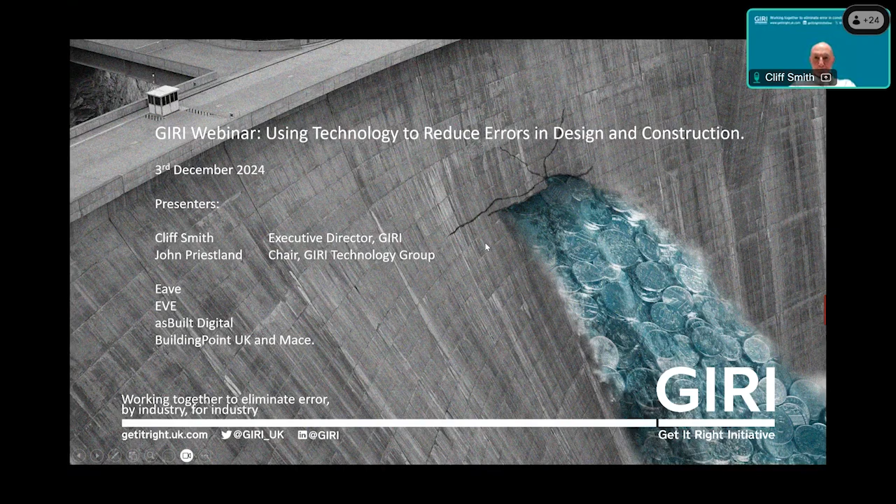GIRI was founded back in 2015 following a meeting at the ICE best practice group, and we obtained funding to do some research into the cost of error, because at the time it was unknown what the cost of waste and error was to the industry.

The result of that research was our strategy for change, and this is a resume of some of the cost reporting that we found. We used various methods to get these figures.

The direct cost of error is 5%. This is the error that one might come across with NCRs and tablet records and things of that nature. Then we have the indirect cost of error, which is the impact on other third parties, normally in the form of loss and expense claims or the like, but that came up at 7%.

And then we have unrecorded process waste, which is at 6%, and this is errors which remain unrecorded. Latent defects come after the building or infrastructure has been handed over, and the total is 21%.

Now, this depends on the complexity and size of the project. It may vary, but it's still an order of magnitude greater than the average return on turnover in terms of profitability. So the root causes of error we found, these were the top 10.

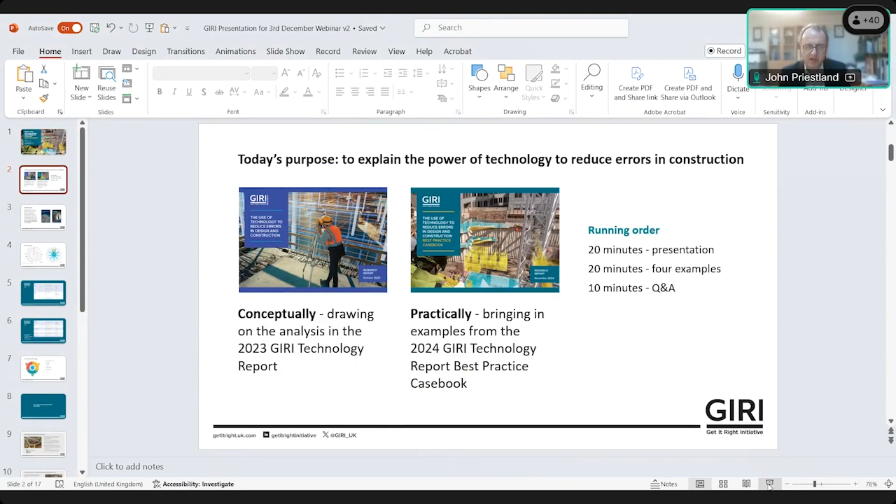Last year we produced a report that considered the types of technology that can help reduce error. This year we've come up with a much more practical report which goes through some of the best practice examples of where technology is really being used to reduce error.

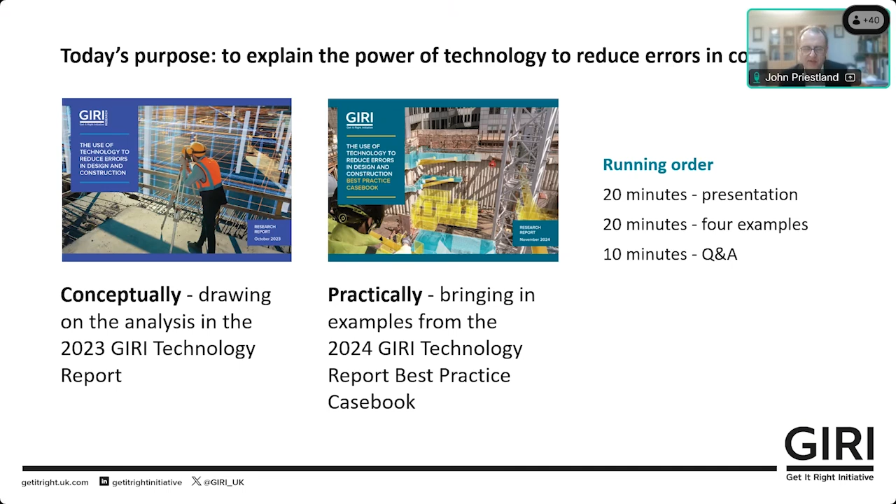So I'm going to talk for a few minutes, but with this being a best practice casebook, we thought we should have some of the people who are doing the best practice. So we have four speakers who are going to talk for five minutes a pop, and they will hold to their time absolutely perfectly. And then, after a little bit further wrap up from me, that should allow us to do a little bit of Q&A.

So our starting point goes back to some of the early days of GIRI and their iconic research report from April 2016, where they came up with 17 most prominent causes of error. And we linked that with work that we've done within the C-Tech Club. The C-Tech Club is a group of more than 400 founders and CEOs of construction tech startups who come together to collaborate and share the celebrations and the commiserations of being a founder in construction.

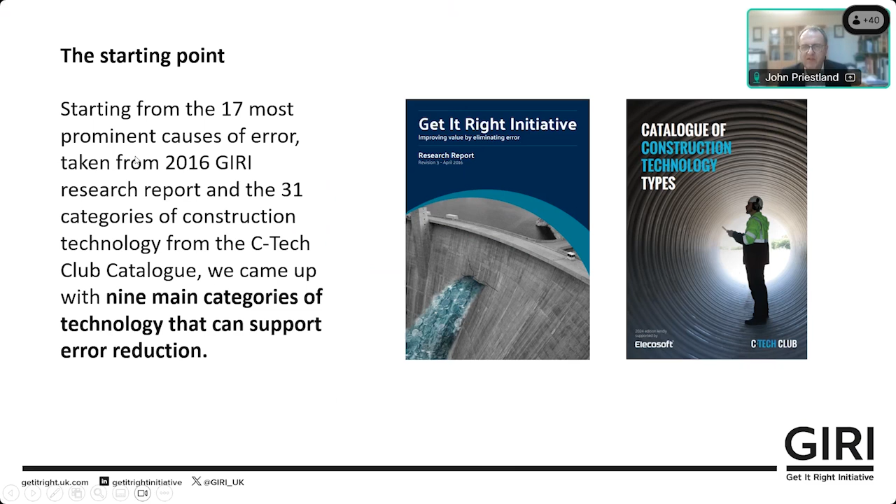And we came up with nine main categories of technology that linked to those 17 most prominent causes of error. So two diagrams to hit you with on the screen. The left one is from the GIRI 2016 report - these are the 17 most prominent causes of error, from inadequate planning, going anti-clockwise, late design changes, poor communication of design information, etc., through to poor site conditions and access. And then the wheel on the right is our C-Tech Club 31 categories of technology, starting from number 1, top right, geotech scans, number 2, 3D visualization environments, all the way through to digital handover software, and the importance of this golden thread of how all the information comes together.

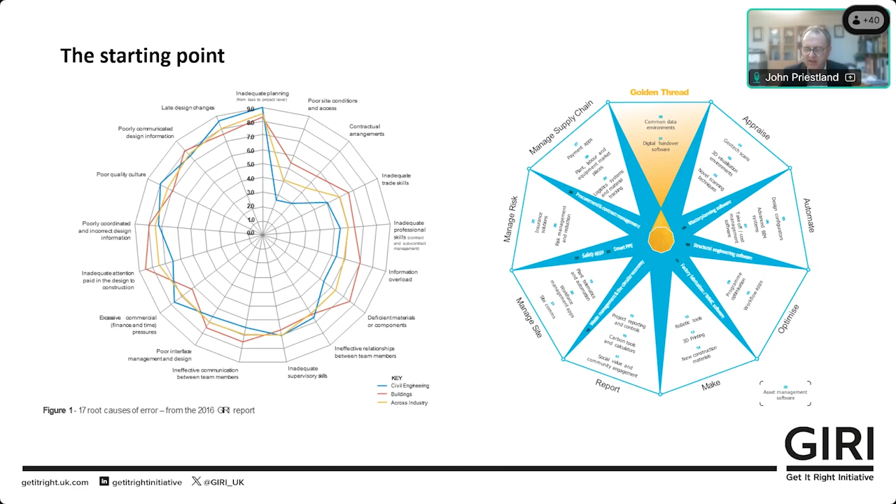So effectively, last year's report was a fusion of the 17 points on the left and 31 points on the right to come up with 9 categories of technology that make the greatest difference.

So we can use technology to check - checking technology around BIM checkers, schedule checkers, data checkers, and checklist technology for our groups and teams on site.

We can use technology to automate the generation of designs or scheduling. So a rules-based system that's going to get it right every time because it's applying the rules in the way the design is laid out or the schedule is laid out. Design configurators and automated scheduling systems being the two subcategories there.

And then seven more categories: workflow engines that are going to ensure that the steps between different stages in the process are managed well, and that there's no error in terms of who's coordinating and who's responsible for each step in that process journey. Visualization systems that with digital rehearsals help people practice before they go and do tasks on site to make them safer, more likely to get right first time, and the ability to visualize and see the tasks and the design environments in a virtual or augmented way before the task is undertaken, in terms of virtual reality, VR, and augmented reality, AR.

Then there's communication and collaboration tools, one of which you're going to see in a few minutes, that help people communicate better, have better structured conversations, so that the error doesn't come from the poor communication or the misunderstanding.

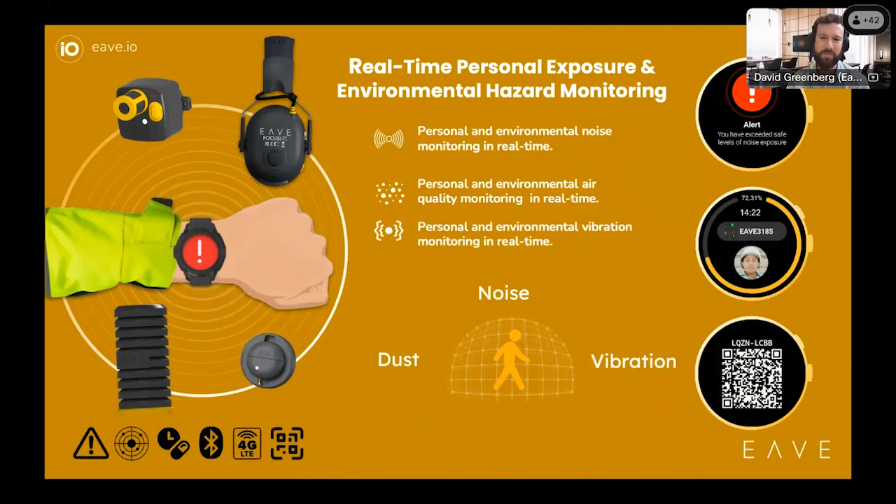So you've got the health watch, which is assigned to an individual. You've got a tool warden, which is doing things like trigger time for power tool usage. You've got noise warden, which doubles as both a personal exposure monitor for noise as well as an environmental noise monitor. And you've got air warden, which does things like particulate matter monitoring, so dust. Obviously, people are worried about silicosis and silica exposure as well as asbestos, but it also does VOC, so volatile organic compounds, so gas exposure when you're doing excavation or demolition work.

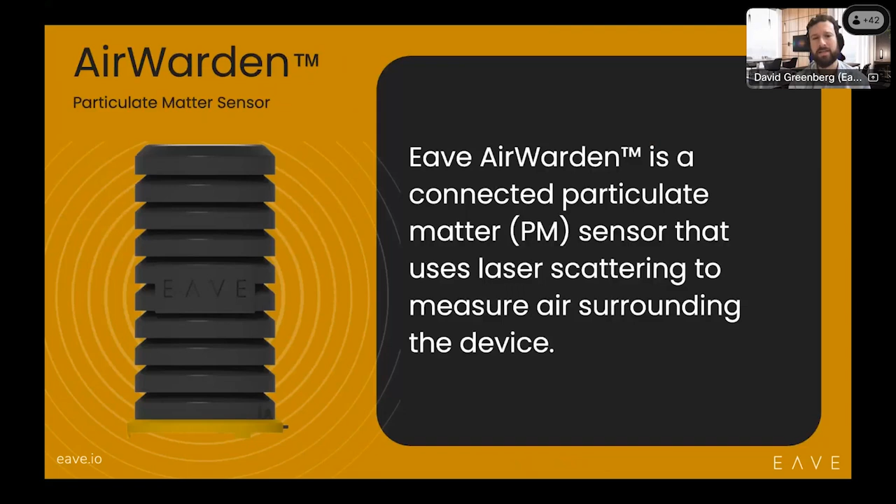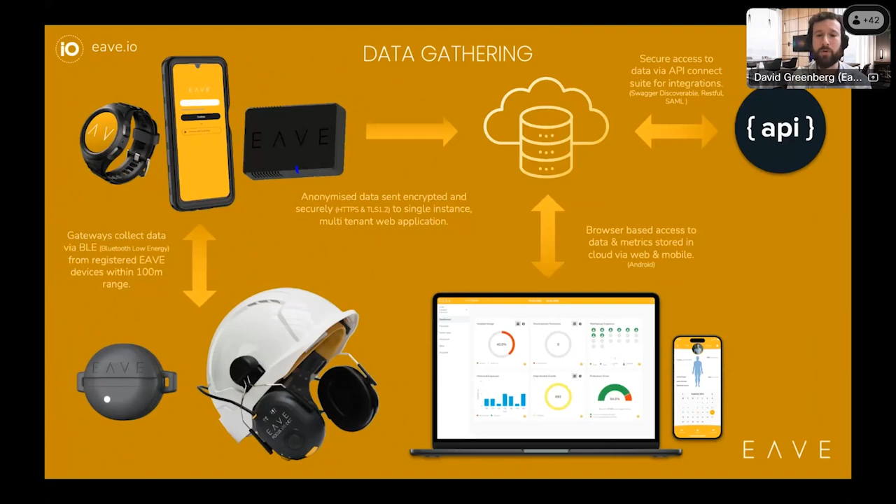It's a total end-to-end ecosystem, so you've got devices in the field, the data goes from the edge to the cloud via those gateway devices, so the watch, the phone, and the smart hub. It connects into whatever platform the construction managers might be using. For example, Power BI is a very common one, but equally they have access to their own proprietary dashboard of information for their company. And that is it. Thank you so much.

It's been a pleasure, obviously, working with the team at GIRI and also with Galliford Try over the years. We often try out some of our new things first with Galliford Try because they've got that sort of forward-thinking mentality, which is fantastic. But if anyone here would like to find out more, then feel free to make contact. Thank you so much.

I love what David's doing because he's moving on from the ear protectors into a whole range of other safety-related and environmental systems, and we are pleased to see that that's what successful startups are doing. It also shows that a safe project is one that's likely to be environmentally well managed, and one where the error reduction, the quality is going to be high as well. I think it's the ability for workers to communicate in the normal way that we saw as particularly linked to error reduction. But thank you very much, David, for all of that, and well done.

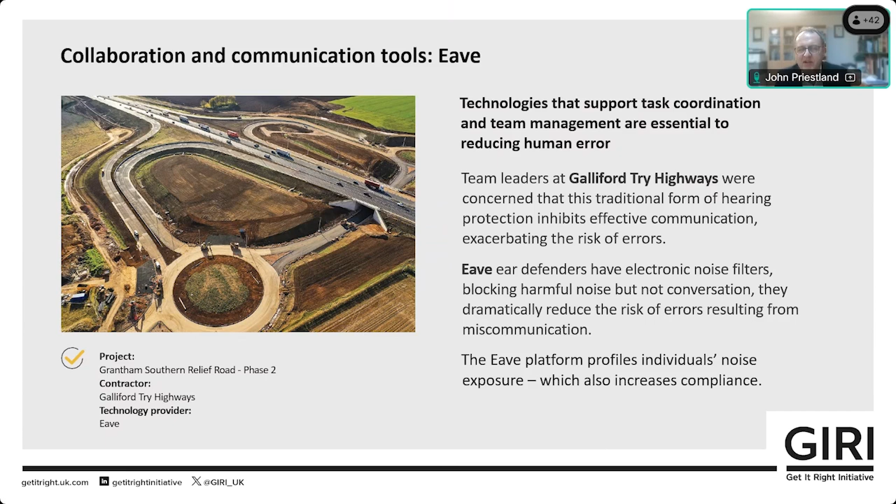Slightly bizarrely, our next technology product that we're going to share with you is also called Eve, spelled slightly differently. Who would have thought? So our next project is EVE, Engineer, Visualize, Explore, a tech system developed by Mabey Hire. The example that John Wrigley is going to talk about is for the contractor George Leslie Limited for the Scottish Water Renewal Project at Happendon.

I'll just emphasise, as I hand over to John, what I think is very pleasing is to see technology and error reduction and quality really being used in the field. This is not abstract, this is for real, and the people here today are able to share what it's actually like on the ground. So John, over to you. Share your screen and take EVE away.

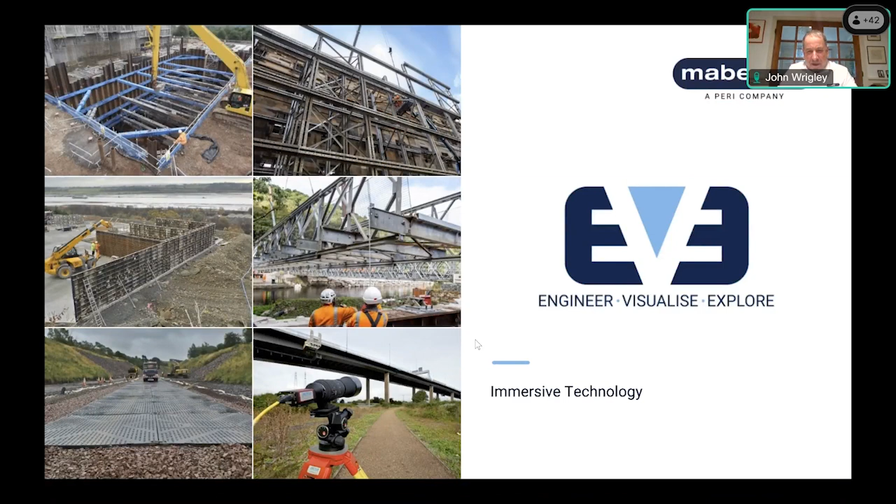Thank you very much. EVE stands for Engineer, Visualize and Explore. I'm John Wrigley from Mabey Hire. We're delighted to be part of the technology report this year. We've used this innovation to essentially cut out mistakes from the planning stage through to delivery on site. We can use it not just to make sure there are no clashes and nothing can go wrong through the planning, but also right through to literally giving an instruction manual on how it needs to fit together on site. It's important to consider that temporary works are one of the nine high-risk areas of the construction process, so it's critical that temporary works are got right first time.

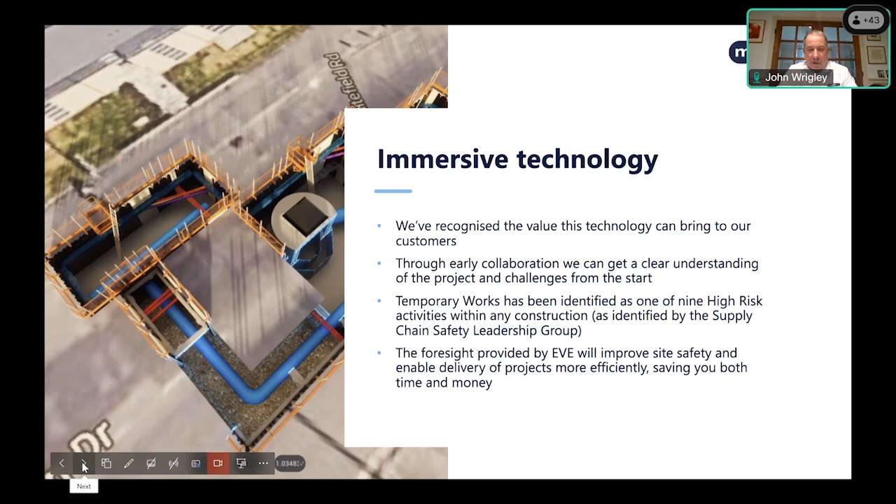So I'm going to show a short video in a minute. Susan, if we could move on to that, which should demonstrate it better than I can describe it.

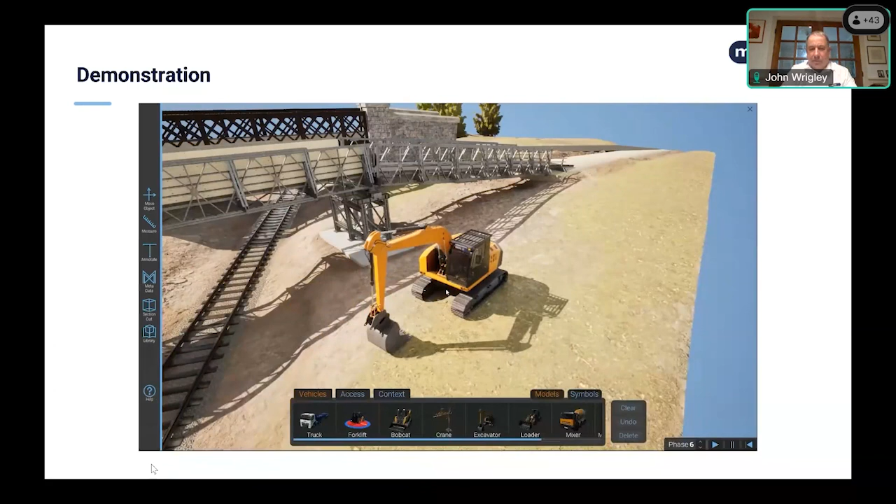I apologise for the music on that one. I had nothing to do with the choice of that.

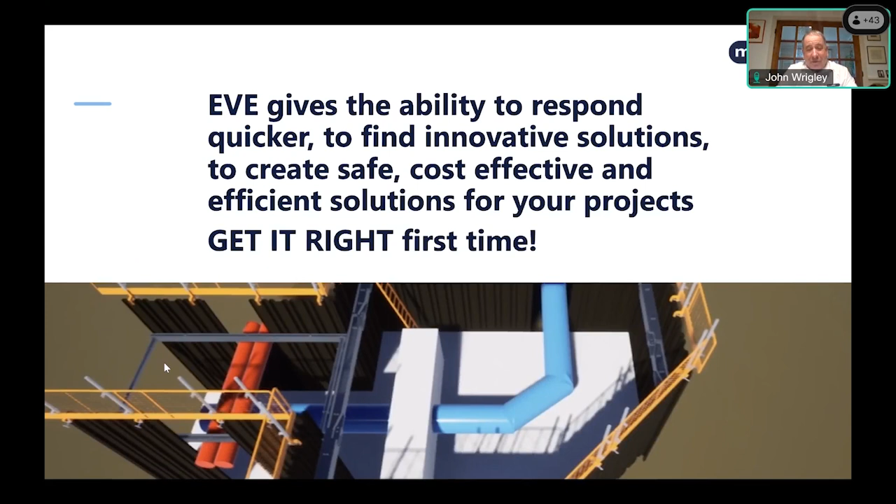So if we go on to the final slide, it's important to point out that we as a temporary works company, despite having hire in our name, we also install, and we use this innovation ourselves. It helps us, and it should help anybody using temporary works. It gives the ability to get it right from the start, right through to the final delivery of the project, which we all know is critical. There's so many things that can go wrong throughout the construction process, and it really does get it right, so I think it fits the bill of GIRI perfectly.

Thank you, John. So it's all about enabling the engineering design team to visualize the site context and provide that visual brief on what was to be excavated. A little bit like a digital twin, being able to see what you need to do beforehand, and then it's easier when you go and get it right first time.

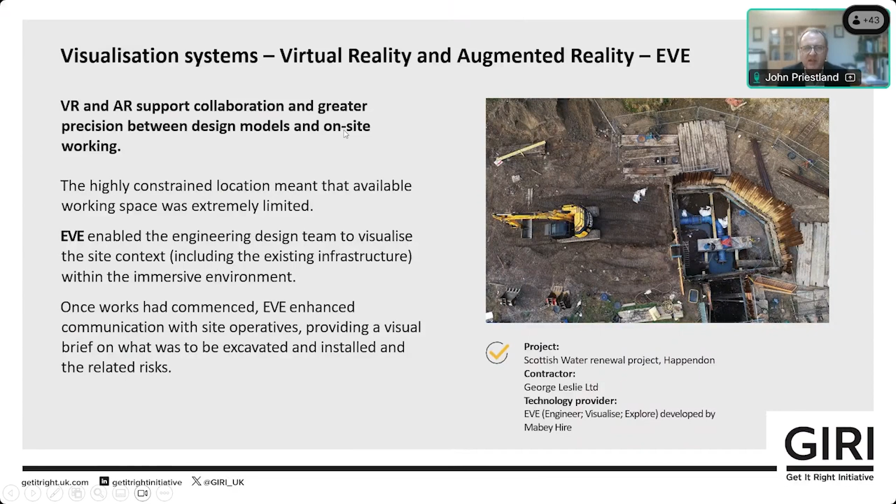So our next presenter, as David Burton knows, one of my favorite projects. This is a project that Asbuilt Digital put together in Adelaide. Imagine the challenges of refurbishing the cladding of a building, which panel goes where, what do you need to do, what sort of database would you need to maintain an accurate record of who's doing what. So David, over to you to tell the audience here about your project with Hindmarsh Construction, and take it away.

Okay, so digital twins. I think John likes the practicality of what we've done here. Digitization in construction, for us, a lot of the focus traditionally has been on converting real bits of paper to digital bits of paper. For us, it offers a whole lot more. This use case here, we use the term digital twin, and I guess that gets banded around so much in our industry. But what does it mean, especially during construction? For us, it's really replicating what's happening on site, the milestone achievement and the workflow, back into this digital environment.

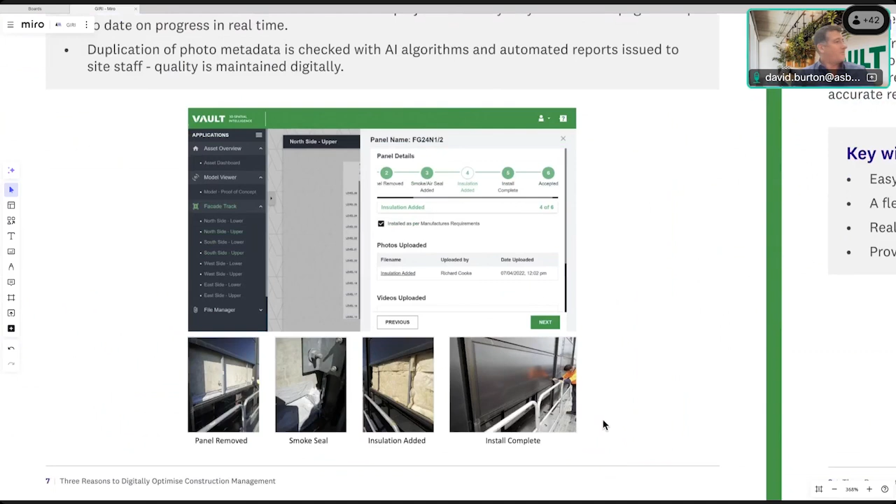Rather unfortunate name, this project. It was on Grenfell Street in Adelaide, Australia, and it was a replacement of the at-risk fire facades.

What we were doing with the contractor and the supply chain on site is each time they did a task, they removed a panel, installed the smoke seal, installed the insulation, completed it. All of that record keeping was done on the device. So really, at the heart of what we were doing, we were speeding up their workflow, removing the paper piece, and recording that almost as it was happening on site.

Now, bless our lovely subcontractors, they don't always do what you want them to. The first month they tried to cheat the system by uploading many of the same photographs. The system checks the metadata and says, hang on guys, that's not quite right.

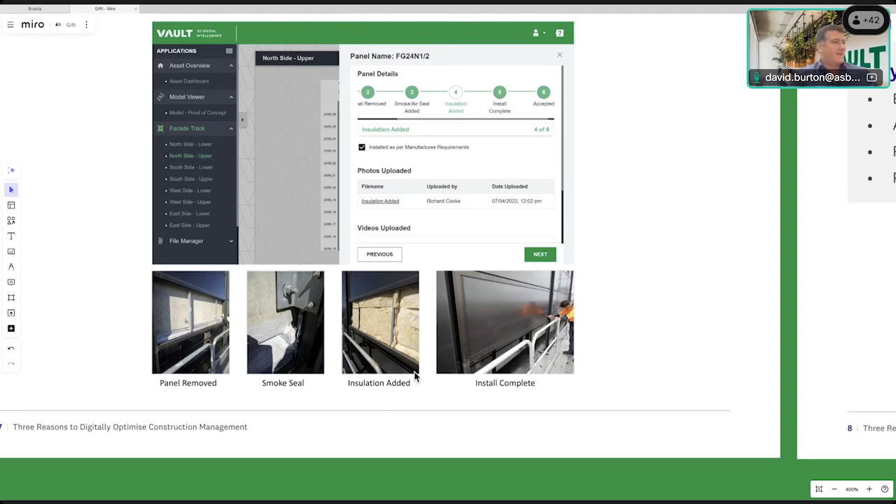Try again. Another quite interesting thing to note on this project, once you start landing incremental data like this, it's not like your normal progress reporting where you get a viewpoint at the end of the week, end of the fortnight, or monthly. We were landing live status as it was happening.

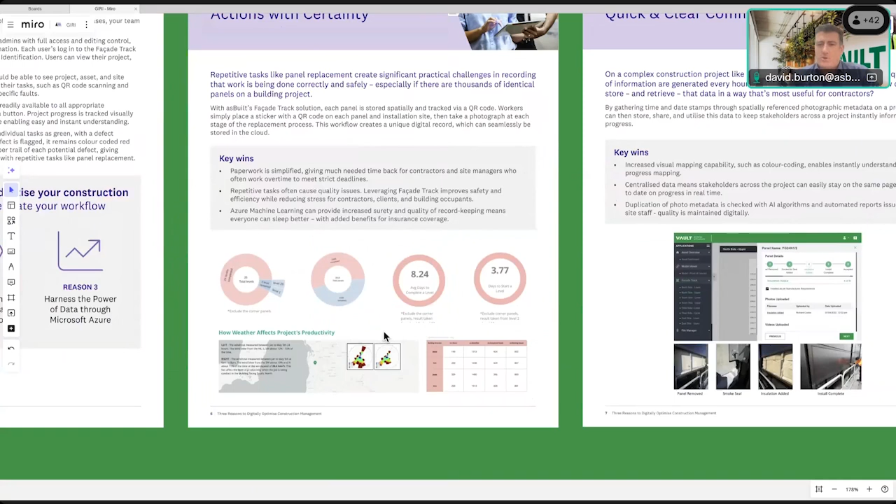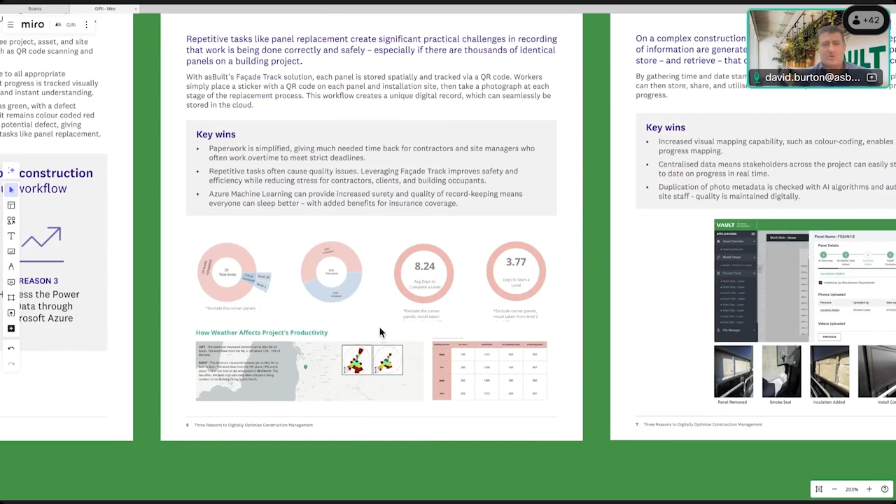The other thing we were doing is connecting it to the actual work package and how the subcontractor was getting paid. So not only was it a compliance QA thing, it actually affected how the contractor was getting paid, which I think drove the correct behaviour on both sides.

More importantly, this term in the UK - I think the UK has been very good over the years of leading and mandating change in our industry, back from early health and safety stuff to mandating BIM, and now this new health and safety legislation around golden thread. So I think it's very innovative thinking, and again, it drives the right behaviour of reporting and material and workflow provenance.

How's that for time, John?

Very good. We're doing very well on time.

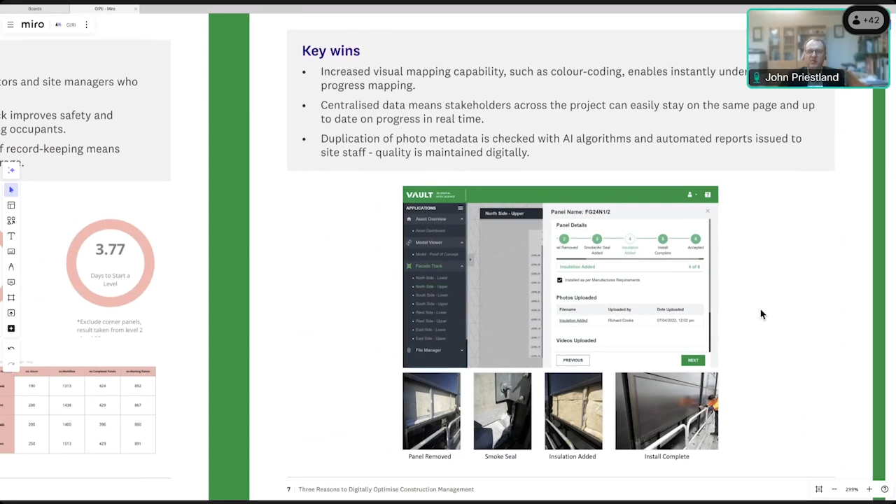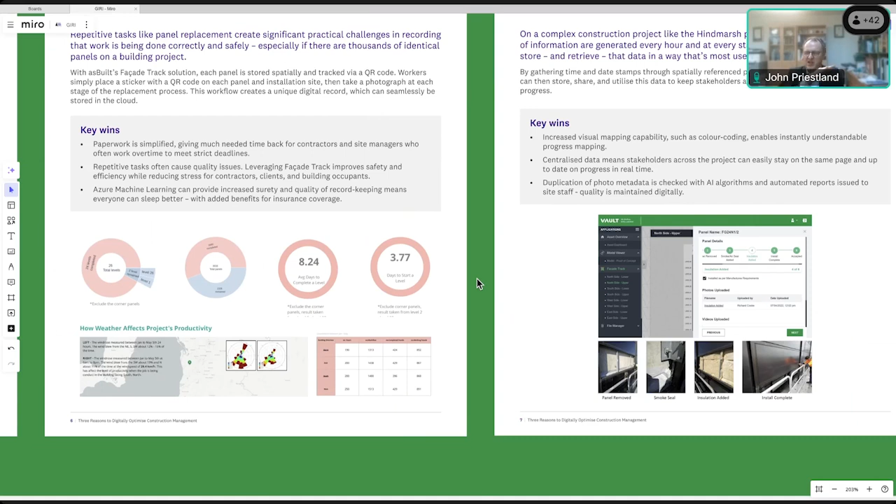So David, let me ask you this question. Do you know what happened next? So your subbies are told they're supposed to upload a bunch of photos to show panel by panel that they've done the replacement and added the necessary insulation behind the new panel. They think, well, we can game the system by uploading the same picture 20 or 30 times. Your metadata analysis shows that A, it's the same data, and B, it doesn't have the right position, given you're effectively running a three-dimensional database. What happened next? Was it easy to get them to go and redo it? Were they kicking and screaming? Because I'm fascinated, as I said earlier, by people, process, technology, and information.

We're in the people and process part of this, which is always the most interesting. Look, yeah, for us it's not about the technology. It's about addressing the real industry problem. For me, we were streamlining the QA process, making it visible to all stakeholders.

That first month, I think we had about 400 duplicates. The following month, we had 2. So look, I think it's not just about compliance with the stick. You've got to give both sides a win, and really, by organising that data and workflow into a three-dimensional database, like you say, we're doing away with a lot of duplication of effort, and at the heart, we're connecting the time, cost, and quality piece back to the three-dimensional database.

So everyone talks about 3D, 4D, 5D, how amazing technology is, but what does it mean? How do we get our commercial team, our scheduling team, and the quality team aligned? This concept of digital twin, another buzzword, has some amazing benefits for that communication and alignment piece.

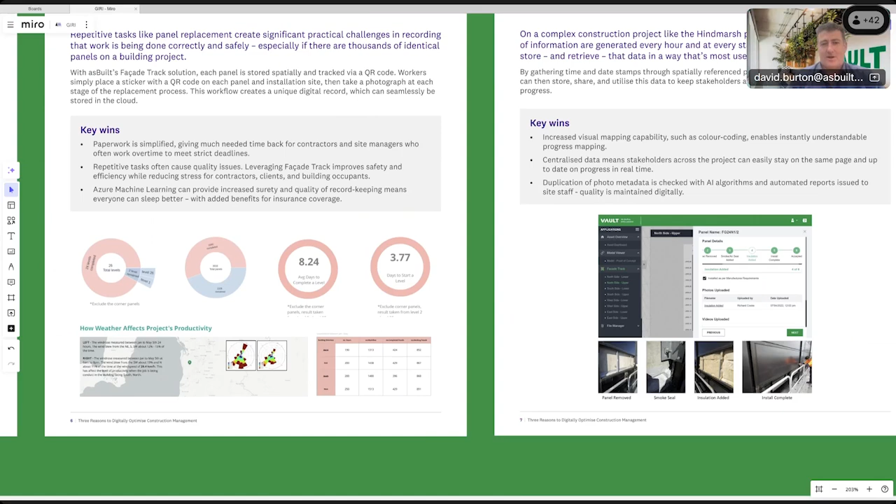Thank you. We'll go to our fourth team featured in the report now, which is the Heathrow Cargo Tunnel Replacement Refurbishment Project, presented by Sam Hoff from Building Point UK and Cameron from Mace Group. As you'll see, they use some funky robotics and visualization tools and techniques, particularly to visualize inaccessible and unsafe areas. Over to you, Sam and Cameron.

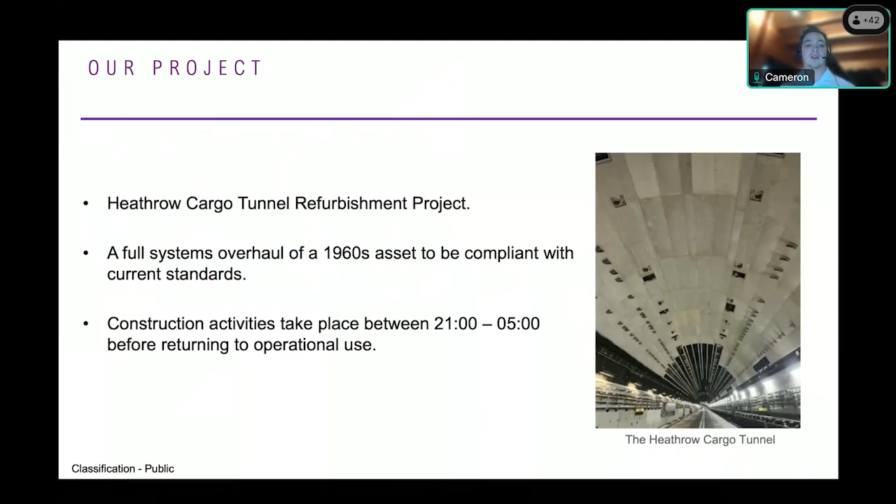It has quite a few issues. So the project is only accessible overnight, outside operational hours. Work can only be completed in high-risk areas in a lot of situations. And the cargo tunnel is also in a border-controlled airside environment, which poses a bit of a problem trying to get people in and out of the site.

So our reasoning for implementing this technology is that the challenging environment prompted the use of off-site construction methods where we could include it. We really wanted to reduce the amount of people and equipment that we'd have to get through border control whenever possible. Implementing robotics and scanning would mean we could get far fewer people onto a site in a high-risk area.

So what did we do? We implemented 3D laser scanning as it would support the reduction of people and equipment onto a high-risk and border-controlled site. Instead of bringing in a third-party survey team, we opted to purchase Boston Dynamics' Dave the Dog, or Spot the Dog, and the Trimble X7 laser scanner, which we can mount directly onto the robot dog as a payload.

This allows us to take scans of the tunnel, particularly in dirty or dangerous areas, to monitor site progress and recognize any errors we may run into. We can use the scans to produce an accurate model, and then upload it directly to the Trimble total station for setting out, which is quite useful.

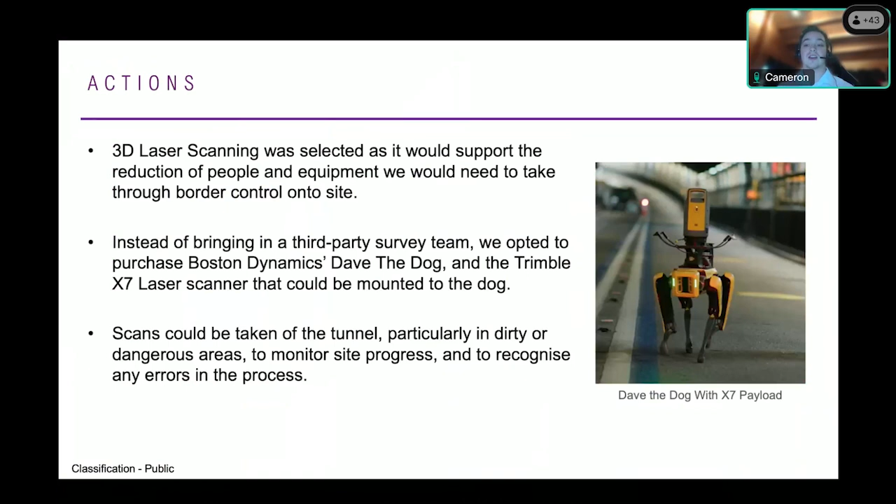These scans enable accurate design. We can then set out to enable accurate placement, and use this to verify and record, double-checking that everything is as it should be.

What sort of benefits do we get from this? Using the dog and the scanner allows us to autonomously collect the scan data in high-risk areas while using less personnel to do so.

Processing the data with Trimble Cloud Engine allows us to reduce human error. We can take the model we've collected, overlay it with our actual model for the site, and create essentially what is a heat map, with colors showing how we deviate from our original designs, so we can tweak it to how we want it to be.

We can also verify installations and surface levels to a highly accurate level with this, allowing us to be more reactive. We're not so reliant on subcontractors to capture data.

It's all done in-house. The setup process is a lot quicker as opposed to setting up total stations or doing all sorts of stuff with tripods. The dog is able to ready itself and do its job without having to keep setting up, moving, and setting up again. It's all done by the dog and the robotics on its own.

This is also quite beneficial as fewer people are required for the scanning process, so getting through border control is a lot quicker. We only have 2 people and the dog, as opposed to a full surveying team for quite a large project.

And this greatly reduces the amount of time that we spend on corrective works. Overall, I think the biggest benefit is we've seen a reduction of 7 weeks against all milestones where this technology has been used. And on a project like Heathrow, where each week can cost quite a lot, it's very beneficial. Speaking of costs...

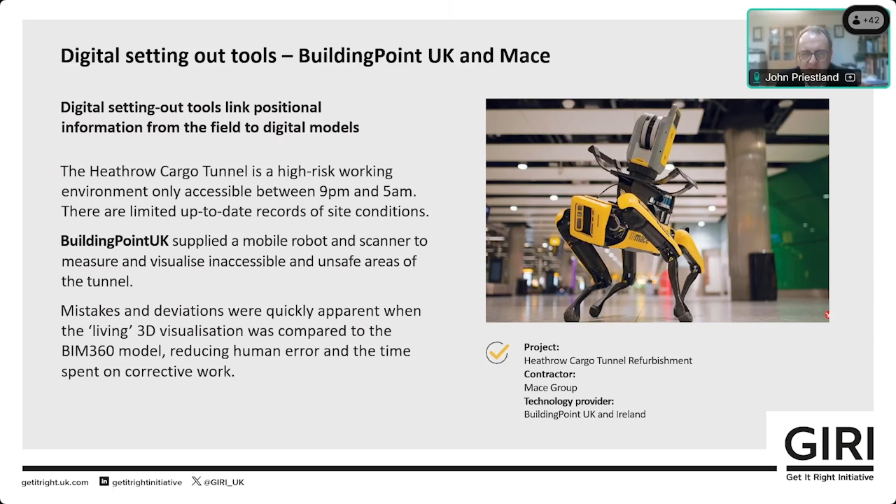So the purpose of what we've been doing with both the case study book and the presentation today is not to say these are the tools for your projects, but to give real evidence and grit, if you like, to the idea that digital tools are here, they're real, and they're bringing substantive benefits in terms of error reduction and other use cases as well. So when you're choosing how to go and manage and run your project, we want to be giving you additional ideas for the digital tools you should be choosing, where to go, what to buy, how those tools should link together.

That's something we're going to be looking at in the next few months. We're going to think about whether each individual tool should continue to be in isolation, or whether we effectively need the toolbox that's going to help those tools integrate, so you go to one place and get access to a lot of tools, and you can get the data to flow between them, and whether there'll be additional reductions in error, improvements in quality, and improvements in efficiency of having these connection systems in place.

And we're also going to be looking at the opportunities for the use of AI to reduce error, but also some of the additional pitfalls and problems of the possibility of using AI.

Can AI itself actually potentially be a source of error? And how can the design of the way in which AI is deployed in construction maximize the positives and minimize the potential negatives?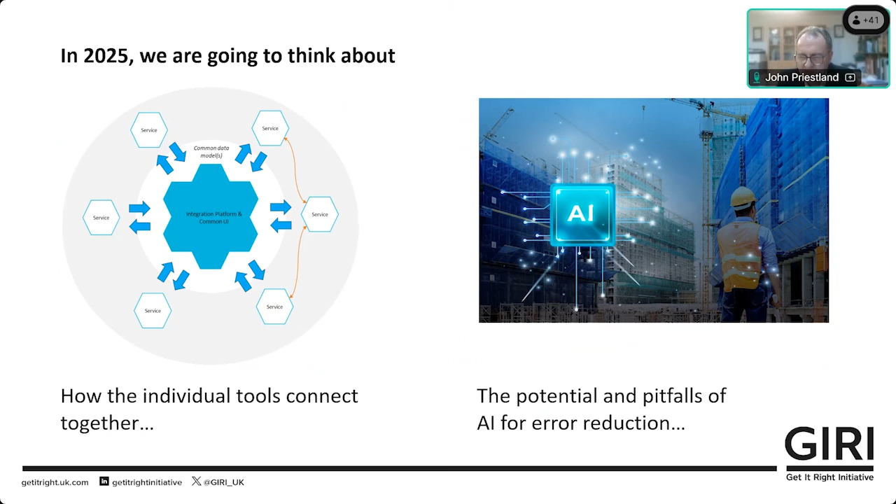The group typically meets the last Friday of the month, 11 o'clock, on a Teams call. We've had a variety of different topics discussed. We had a session on big tech where we had Google, Procore, Microsoft. We've had a number of startups come and present. Last Friday, we had a special session around the challenges and opportunities for the use of technology for quality management in the nuclear sector, with 3 speakers, one from Hinkley Point C, one from Sizewell C, and one from Nuclear Waste Services and the Geological Disposal Facilities.